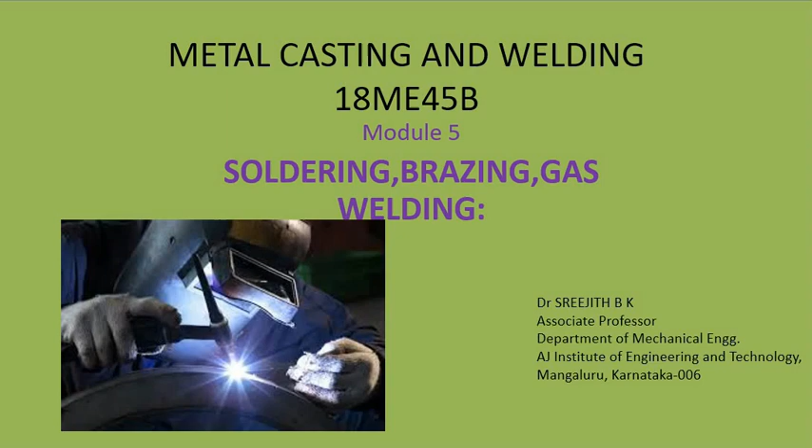First, the soldering. The process of joining two dissimilar or similar metals under heat with the help of a solder and a flux is called soldering. So in soldering, the base metals which need to be joined are not necessary to get melted. Instead, the solder will get melted, and because of the adhesive force between the solder and the base metal, the joint will be established. In order to avoid oxidation, flux will be used.

We are very much familiar with electronic soldering. In the same way, in electronic soldering there will be a heat source called a solder iron or soldering iron, then some flux material and solder. Similarly, for mechanical joints also, usually soldering methods are used in industry.

Flux is a kind of cleaning agent used to prevent oxidation of metals at the soldering point. It helps the solder to melt quickly and allow it to flow freely to unite more firmly. It is usually made up of zinc chloride, ammonium chloride, hydrochloric acid, borax, rosin, turpentine oil, etc.

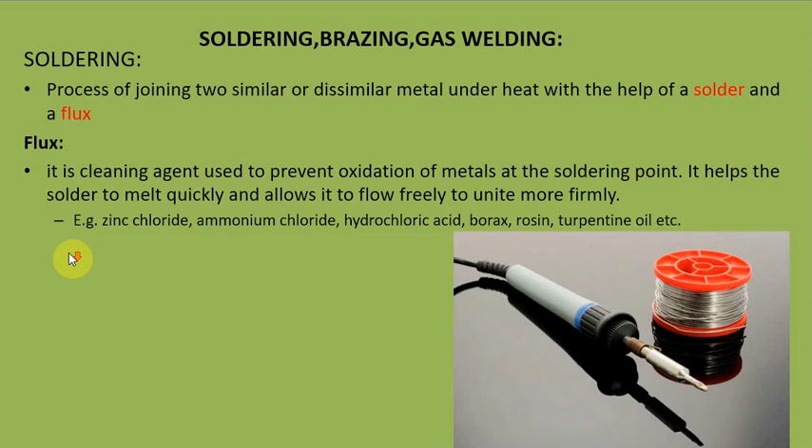Now solders. Generally it is an alloy of lead and tin. It melts at low temperature. For strong joints, a mixture of copper and zinc is used, which has a high melting point. So if the required bond should be strong, then copper and zinc mixture is used. Otherwise, it is a lead and tin alloy.

So solder flows between the gap by capillary action. Due to this capillary action, the molten solder will flow into the gap between the joint metal and fill the gap, and due to this adhesive force, it will make a bond.

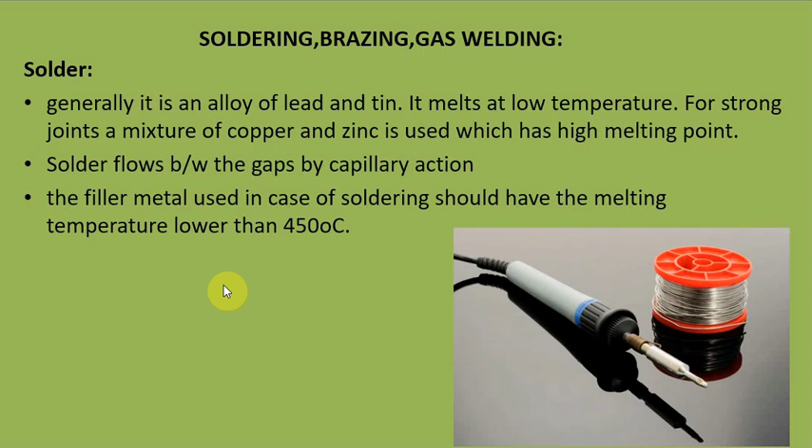The filler metal used in case of soldering should have a melting temperature less than 450 degrees Celsius. This is one of the major differences between soldering and brazing. Here the temperature of filler metal is less than 450 degrees Celsius.

Now types of solders. There are two kinds, soft solders and hard solders. Soft solders are alloys of tin and lead. They have low melting points, like 150 to 190 degrees Celsius. The chemical composition is 0.5% antimony added to improve the mechanical property of solders. Soft solders are used where the joints are not subject to heavy load and high temperature.

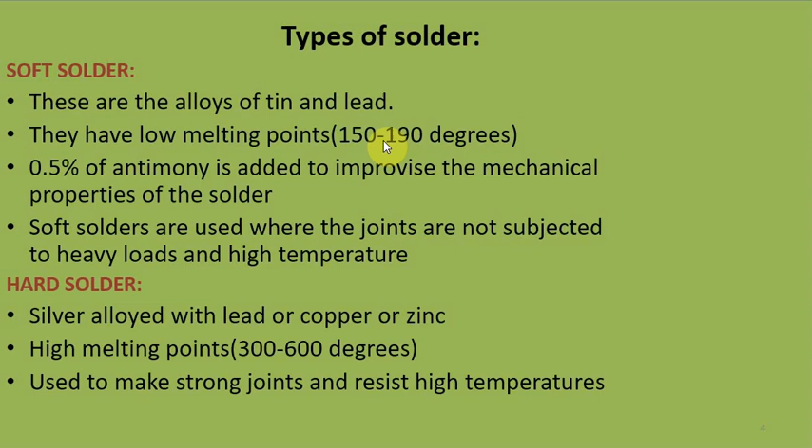In case of hard solders, it's silver alloyed with lead or copper or zinc. It has high melting points, like 300 to 600 degrees Celsius, used to make strong joints and resist high temperature. So compared to the soft soldering method, if you need high mechanical strength, we can go for hard soldering.

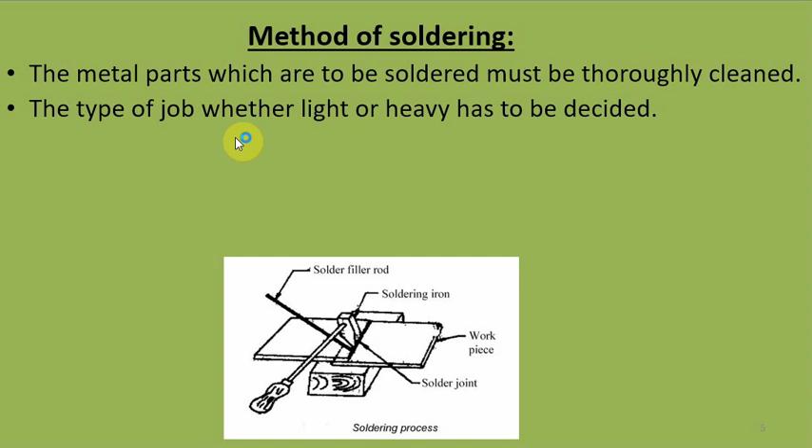This is a schematic for a soldering process. So the steps in soldering: the metal parts which are to be soldered must be cleaned. The type of job, whether light or heavy, has to be decided in order to select the solder. A good soldering iron has to be selected.

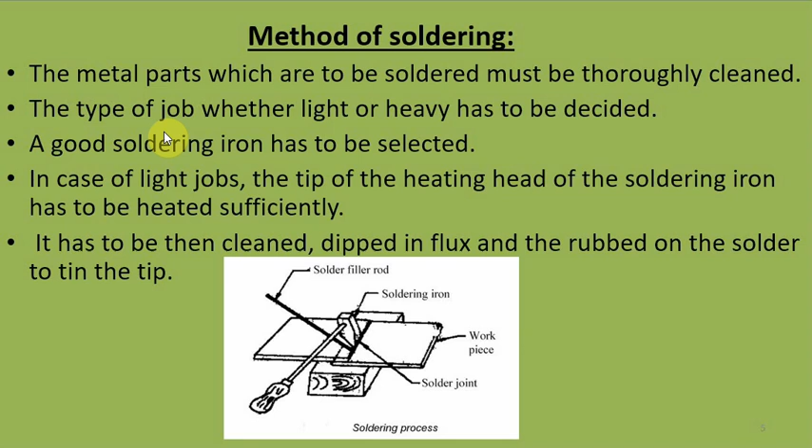In case of light jobs, the tip of the heating head of the soldering iron has to be heated sufficiently. It has to be then cleaned, dipped in flux and rubbed on the solder to tin the tip. The molten solder has to be then deposited on the joint.

In case of heavy jobs, the surface must be tinned first by cleaning and heating using a blowtorch. The job must be dipped in flux. Using a soldering iron, the solder has to be applied over the parts. The parts may be then assembled and heated together until the solder melts. In case a corrosive flux is used, the soldered job must be washed with water.

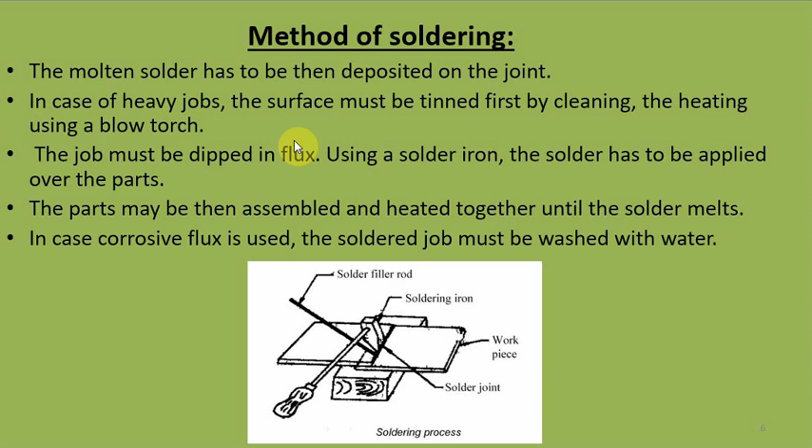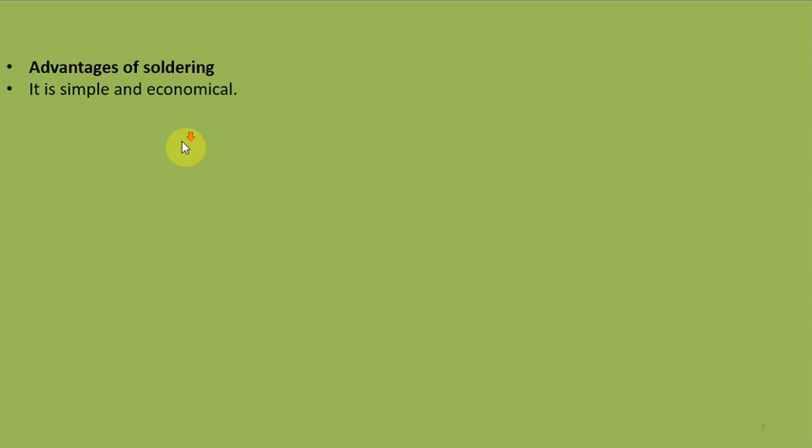Now we will see what are the advantages, disadvantages and applications of soldering. The advantages of soldering: first, it is simple and economical. Base metals are safe against metallurgical damage due to low operating temperature, and also the base metals are not going to melt, so its mechanical, thermal and metallurgical properties will be retained.

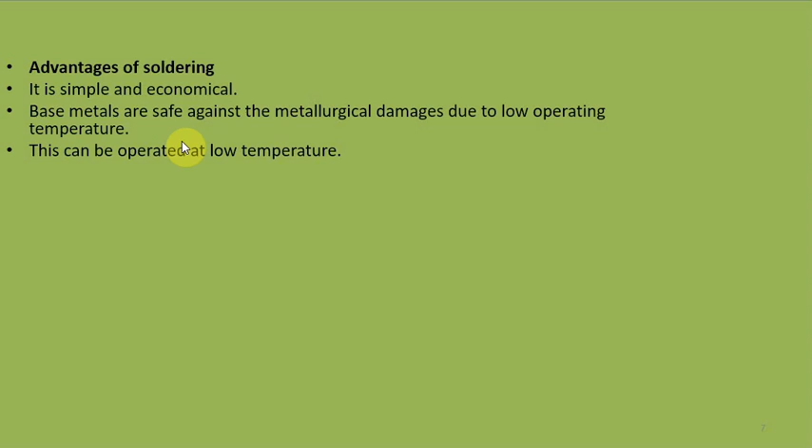This can be operated at a low temperature. Base metal does not melt. Any metals or non-metals can be joined by this process. You know that in case of electronic PCBs, we are joining non-metals. One part may be metal and we are joining that metal part with a non-metal PCB. This operation requires low power and less time to join. It can be easily operated. Now, disadvantages of soldering: the strength of joining is less.

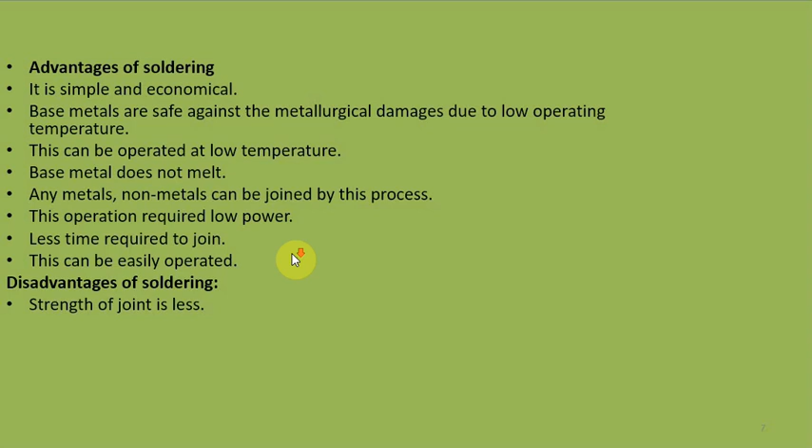It's not useful when joints work under high temperature, because then the solders will get remelted and the joining will be detached. It's not useful for long length welding; mostly it is used in very short or point-wise welding. Heavy metals cannot be welded by this operation.

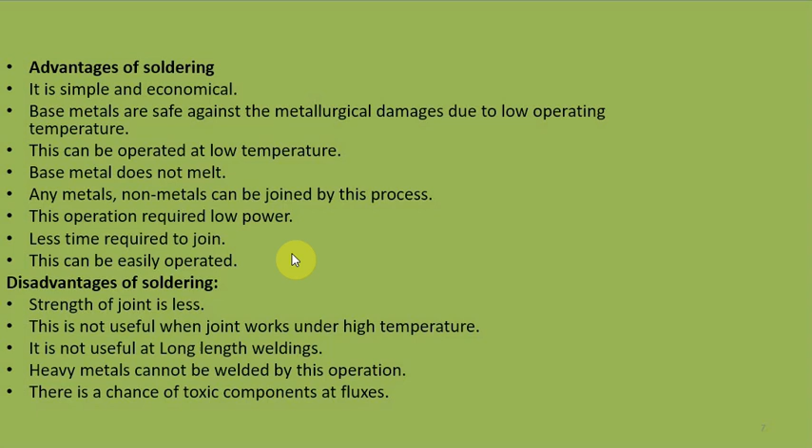There's a chance of toxic components at fluxes. That means when we are applying the flux, it will get melted, and sometimes it may generate some toxic gases which is hazardous to us.

Now the applications are: it's commonly used in electronics, heating, air conditioning, mechanical, fire sprinkler and other similar systems, as well as radiator manufacturing, repair and sheet metal works. Also used in jewelry and stained glass work.

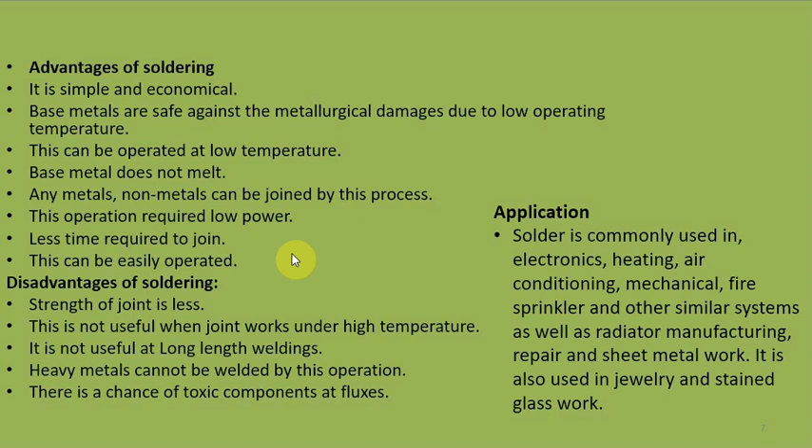The second kind of joining method is brazing. Brazing is the process of joining two metal pieces with the help of non-ferrous filler metal at a comparatively higher temperature, more than 450 degrees Celsius.

This is the major difference between brazing and soldering. Here we are going for a temperature beyond 450 degrees Celsius, and here also we are using a filler metal, which mostly will be non-ferrous.

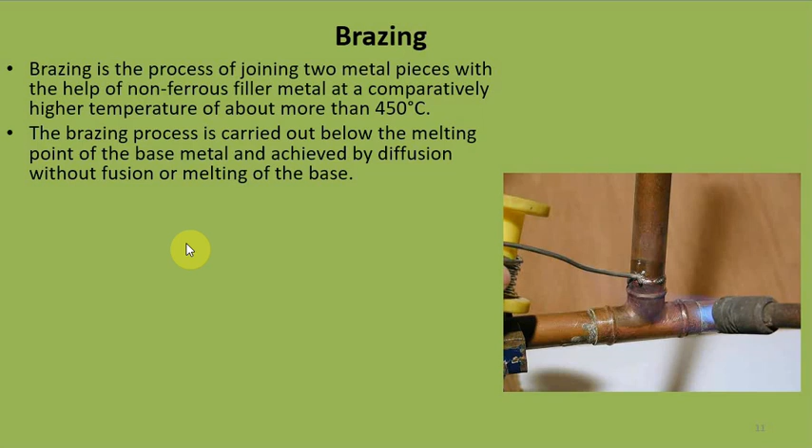The brazing process is carried out below the melting point of base metal. That means the metals to be joined are not going to melt, and the joining is achieved by diffusion without fusion or melting of the base.

This process is most suitable for joining dissimilar metals, and the filler rod used must be made up of non-ferrous metal. The most commonly used filler metals are copper and copper alloys, silver and silver alloys. So it depends upon the type of metals which need to be joined, a suitable filler metal needs to be selected.

The filler metal fills the gap during the operation. The brazing process also needs a suitable flux to prevent the oxidation of the base metal, and commonly used fluxes are borax, fluorides, chlorides and boric acids. So we came across the filler metal and the flux.

The heat generation, or the required heat, is generated with the help of a welding torch, usually either oxygen acetylene combination or any other oxy fuel combination, or even an LPG heating torch, also used in case of brazing.

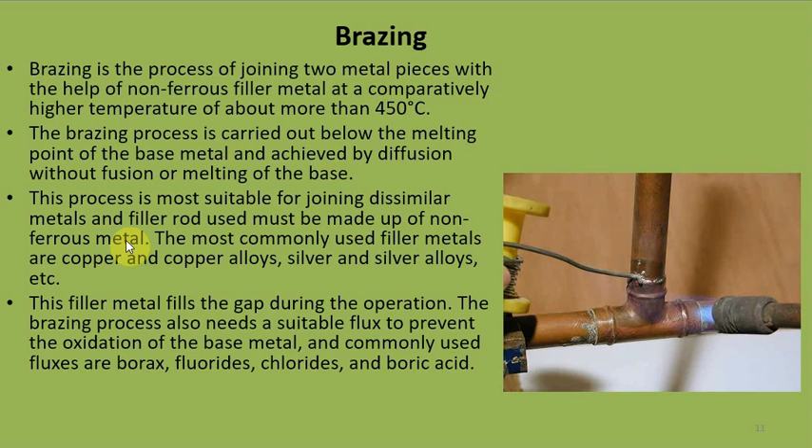The step-by-step process related to brazing procedure: first, the surfaces to be joined are cleaned, and dust, oil, grease, oxides and other foreign substances are to be removed.

Now apply the suitable flux where brazing is to be carried out. This is used to avoid base metal oxidation and to help the filler material flow easily by capillary action. The filler material is placed at the place where the brazing is to be carried out, like this.

So here we want the joint, so we keep the filler material here. Even separately feeding, if the worker is an expert, separately we feed the filler material.

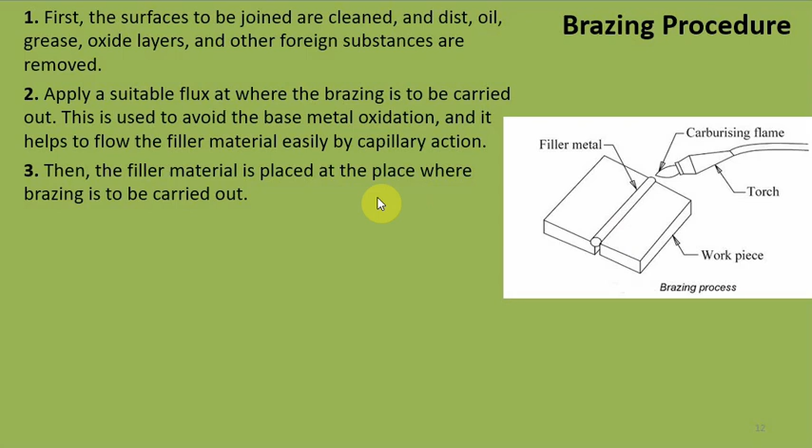By using a carburizing flame, raise the temperature above the melting point of the filler material so that the filler metal will get melted. After raising the temperature of the filler material, molten metal is formed and is flowed into the gap by capillary action.

Allow the filler metal and base metal to solidify, then cool the base metal slowly to get a strong bonding. The leftover fluxes are cleaned immediately after the brazing process because it is corrosive in nature.

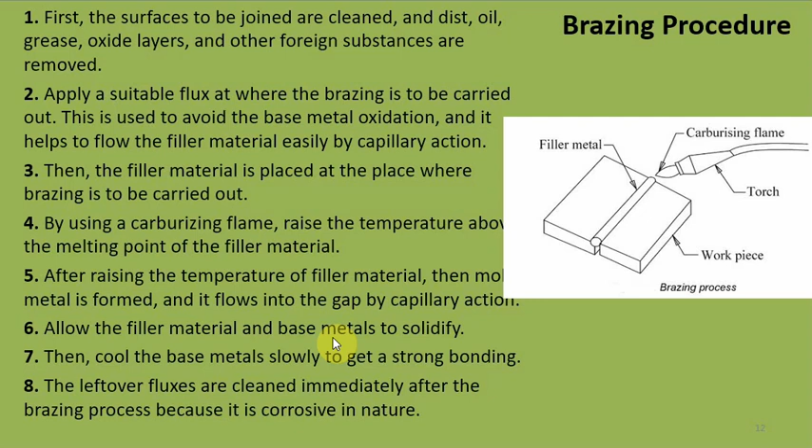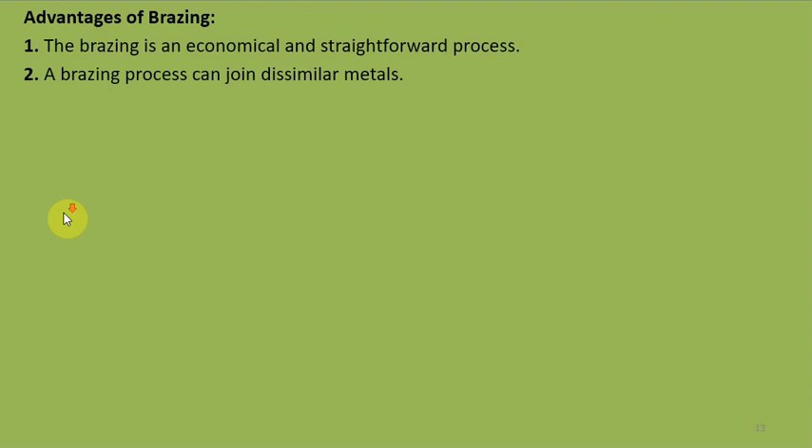Now the advantages of brazing are: it is an economical and straightforward process. Brazing can be used to join dissimilar metals. Low gauge or thin section plates are joined very easily, but such pieces cannot be joined by welding.

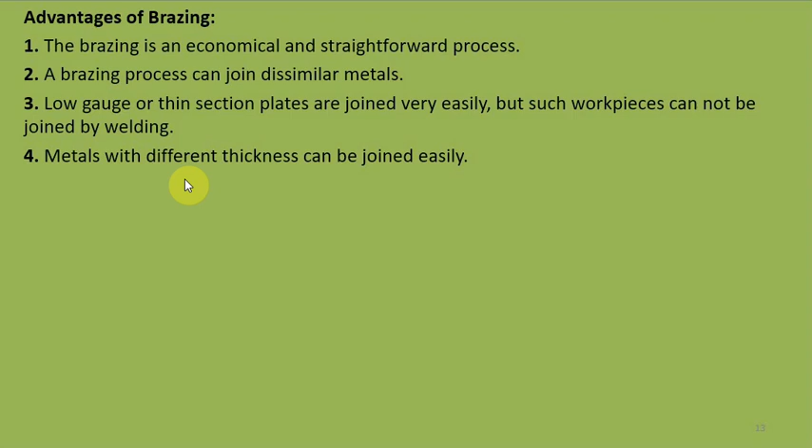So brazing is used mainly whenever we have thin plates that need to be joined. Metals with different thicknesses can be joined, but we cannot go for very thick metals. Joints produced with the brazing process are better in appearance because stress will not be induced, there is no metallurgical damage, and no distortion of the plate takes place.

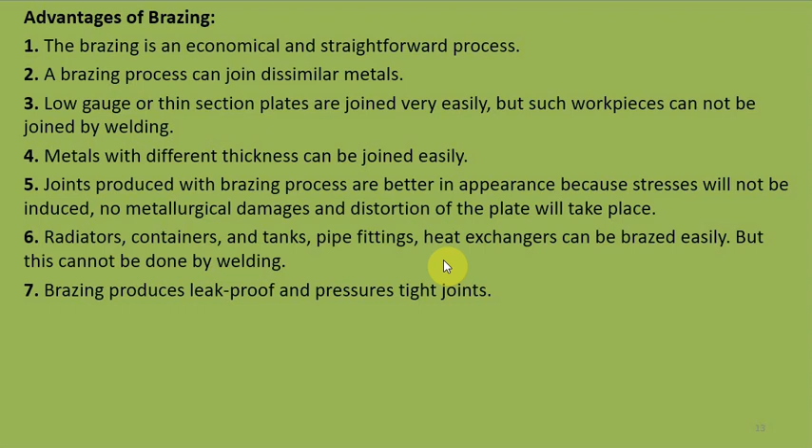So application-wise: radiators, containers and tanks, pipe fitting, heat exchangers, air conditioning and refrigeration conduit pipes - everything can be easily brazed, but it cannot be done by welding. Brazing produces leak-proof and pressure-tight joints.

The disadvantages are: heavy sections cannot be joined by brazing.

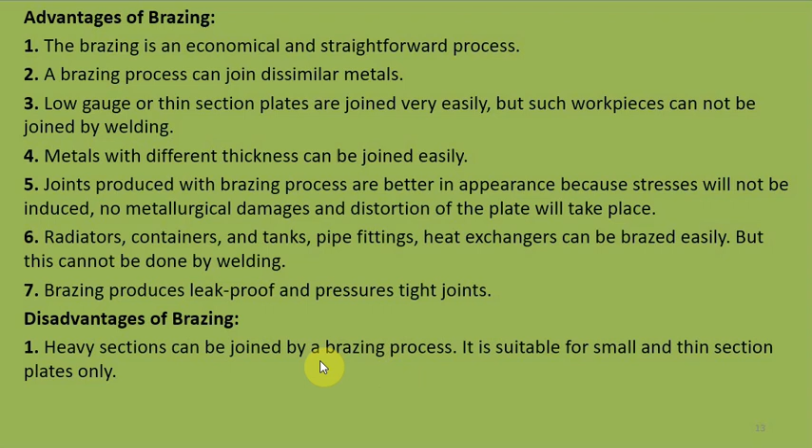Heavy sections cannot be joined by the brazing process. It is suitable for small and thin sections only. Skilled labor is required for brazing. Brazing results in low strength joining compared to welding.

Now let's go for a comparison between the soldering process and the brazing process. This is very important. Solder is used in the soldering process, and spelters are used in the brazing process. That means a filler metal is used in both.

In soldering, joints are not very strong. In brazing, joints are comparatively strong and pressure tight. Soldering cost is less, while brazing cost is more.

Chlorides of zinc and rosin are used as flux in soldering. Ash or borax is used as flux in brazing.

Low temperature is sufficient for soldering, meaning less than 450 degrees, whereas high temperature is necessary for brazing, more than 450 degrees. Soldering is suitable only with thin sheet metal, while brazing is suitable even for comparatively thicker metals, but not for heavy thick metal.

Soldered parts are to be cleaned with water, while brazed parts are to be allowed to cool slowly, with no need to clean again. If required, we can chip off the excess flux formed. So these are the comparisons between soldering and brazing.

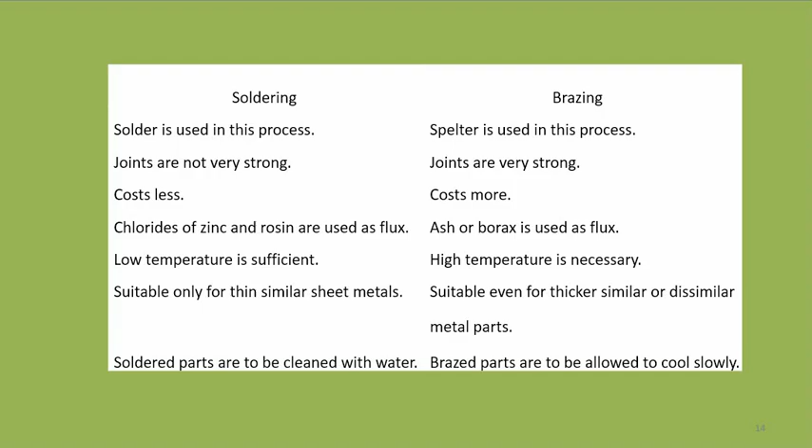Now we will see what gas welding is.

The welding torch is connected to two gas cylinders through two hoses. One usually will be the oxidizer or oxygen cylinder, and the other will be the fuel cylinder.

There will be pressure regulators which regulate the pressure or flow rate of gas coming out of these cylinders.

So the oxygen and the fuel gas will get mixed, and it will be burned at the tip.

Based on the kind of fuel used, the oxy-fuel process is also called oxy-fuel welding, based on which fuel is used in combination with oxygen.

It can be classified as oxyacetylene, oxyhydrogen, etc.

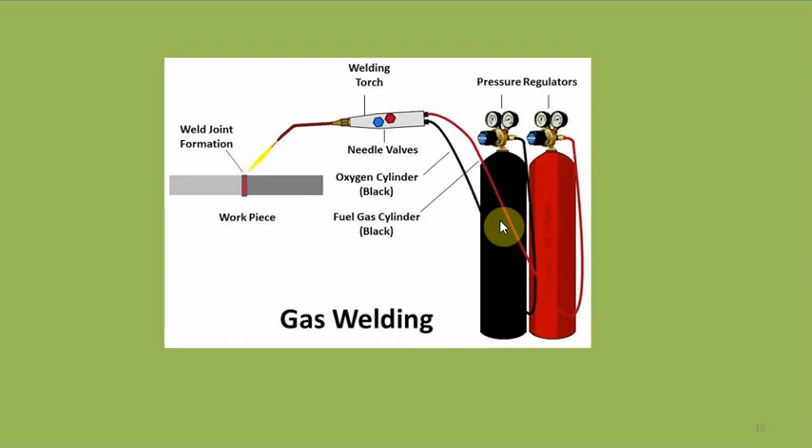So gas welding is a welding process that melts and joins metals by heating them with a flame caused by a reaction of fuel gas and oxygen.

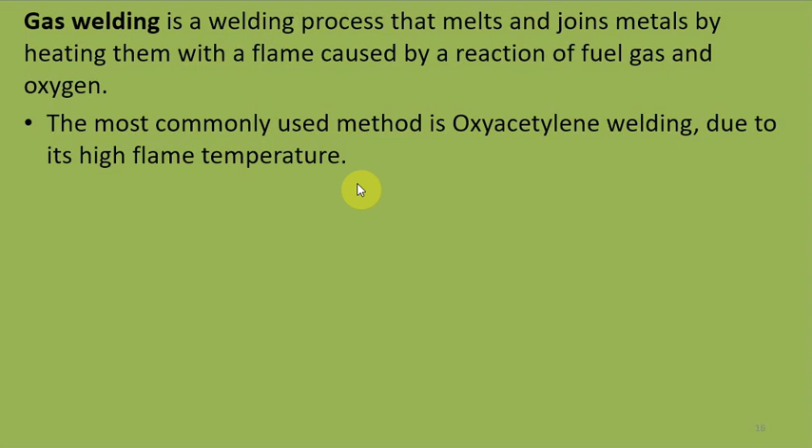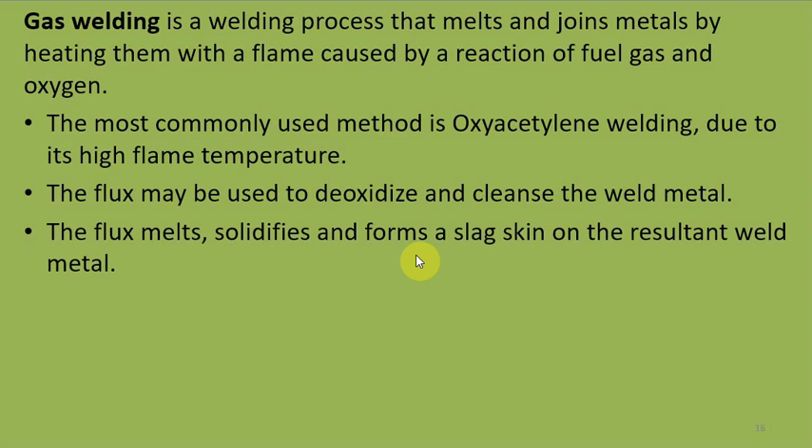The most commonly used method is oxyacetylene welding due to its high flame temperature. Flux may be used to deoxidize and cleanse the weld metal. The flux melts, solidifies, and forms a slag skin on the resultant weld metal.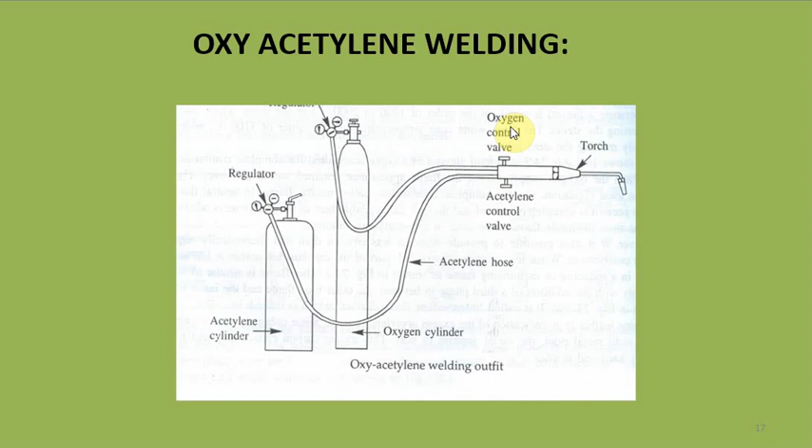This is the torch tip where the flame is formed. Welding torch, pressure regulator, cylinders, goggles, spark lighters, flux, apron, and gloves are the required components for this welding.

Oxygen is usually stored at a pressure of 13.8 to 18.2 megapascals. Acetylene can be stored, but if stored above 200 kilopascals, it may explode.

In such cases, it has to be generated. So either you can use a pre-filled acetylene cylinder or you can use an acetylene generator.

To start the flame, the acetylene is released slowly and lighted with a spark lighter at the torch tip. So initially the acetylene is released first, then it will react with atmospheric oxygen to form the flame.

So C2H2 is the acetylene. It will react with oxygen, which results in 2 CO2, carbon dioxide, water, and heat.

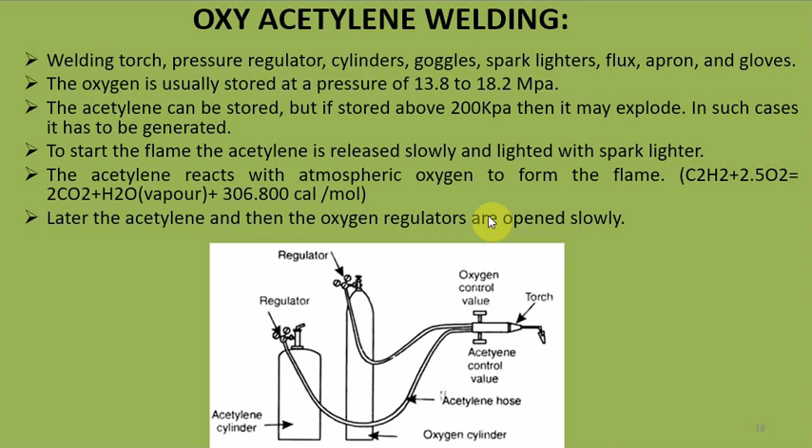It is an exothermic reaction. Later, the acetylene and then the oxygen regulators are opened slowly in order to maintain a stable, required kind of flame.

Some important applications of oxyacetylene welding are for joining most ferrous and non-ferrous metals, carbon steels, alloy steels, cast iron, aluminium and its alloys, nickel, magnesium, copper and its alloys, etc.

For joining thin metals, for joining metals in automotive and aircraft industries, for joining in sheet metal fabrication plants, and for joining metals that require a relatively slow rate of heating and cooling.

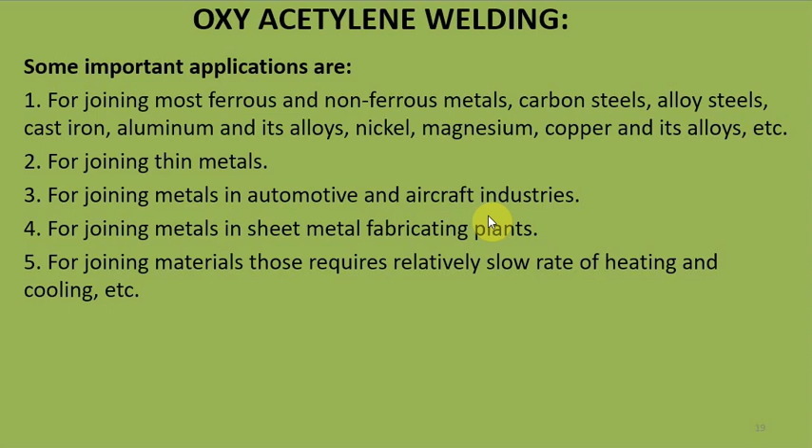Some advantages are it's portable and most versatile process. Better control over the temperature by adjusting the oxygen valve, and better control over filler metal deposition rate. In gas welding, the source of heat and filler metal are separated, unlike arc welding, which provides better control over filler metal deposition rate. It is suitable to weld dissimilar metal, and has low cost and maintenance.

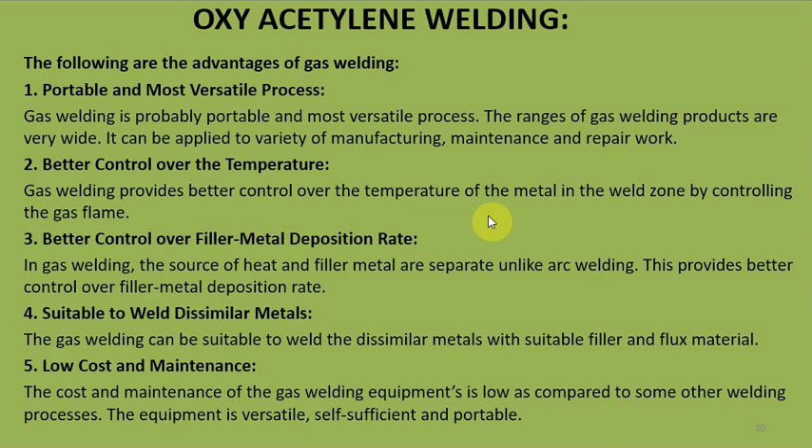Some disadvantages are: not suitable for heavy and thick sections. Less working temperature of gas flame compared to other kinds of welding like arc welding. Slow rate of heating, and not suitable for refractory and reactive metals. Refractory metals like tungsten, molybdenum, and reactive metals like titanium, zirconium cannot be welded by gas welding. There is a large heat affected area, because the heat zone produced by the torch tip or flame is larger in area, so it will affect the metallurgical property of the material.

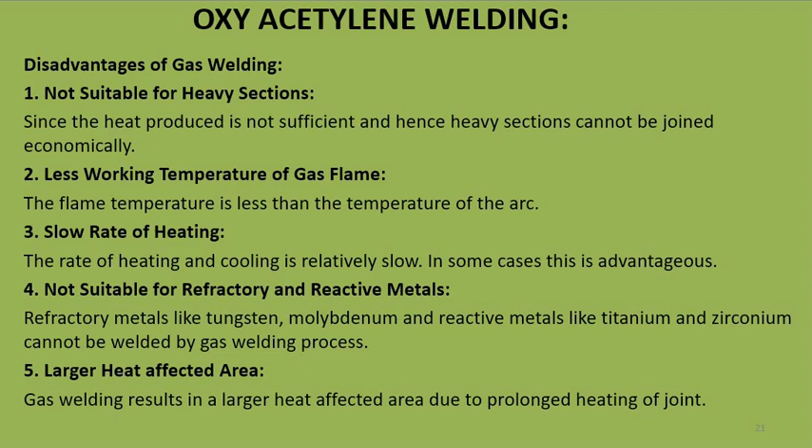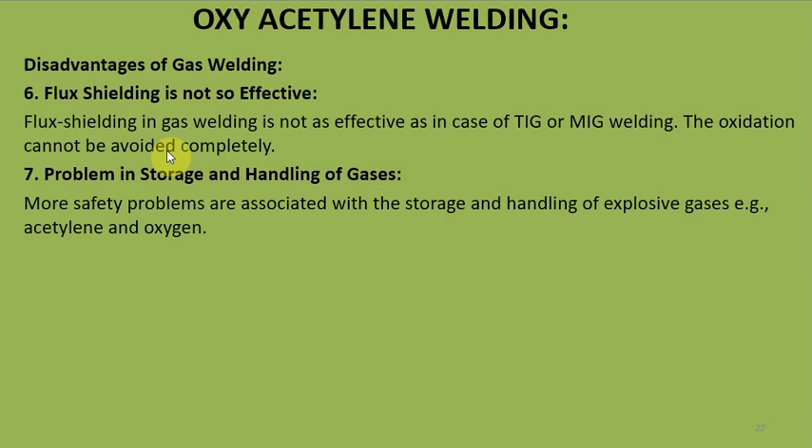Flux shield is not so effective in gas welding as it is in case of TIG or MIG welding. Oxidation cannot be avoided completely, because here we are directly injecting oxygen gas for the flame requirement. We are pressurizing the oxygen to impinge on the heat affected zone, because of that there is comparatively more chance of oxidation. There is also a problem in storage and handling of gases, with more safety issues associated with storage and handling of explosive gases, especially acetylene and oxygen.

Now we will see which types of flames we can achieve by controlling the oxygen flow into this torch.

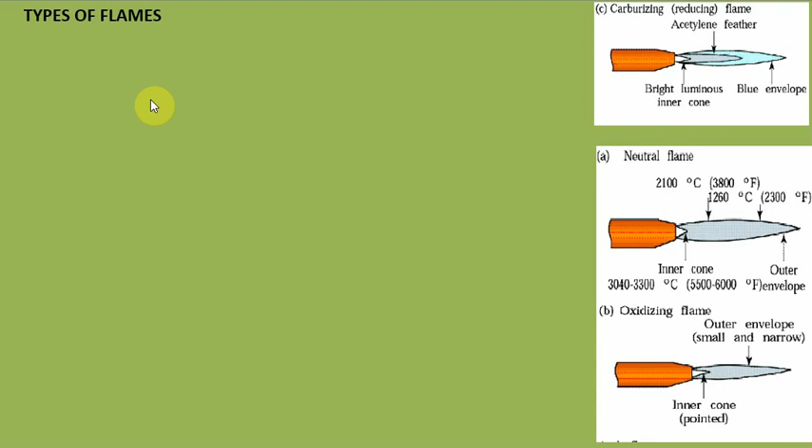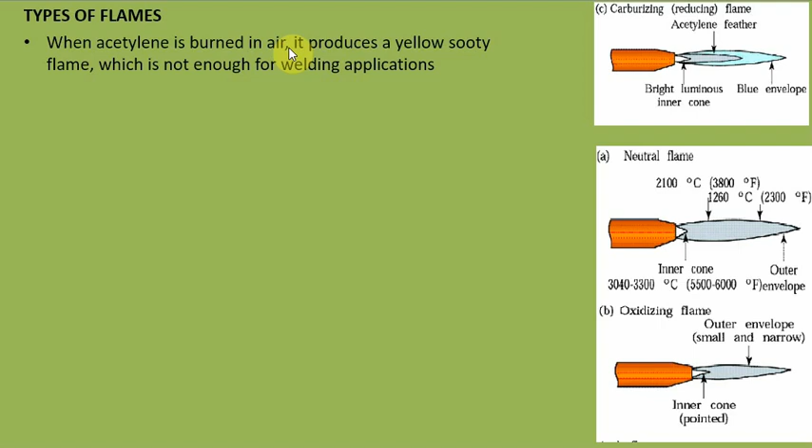When acetylene is burned in air, without the supply of pressurized oxygen, it produces a sooty flame, which is not enough for welding application. When oxygen is turned on, the flame immediately changes into a long white inner area, surrounded by a transparent blue flame, and it is called a carburizing flame, having a temperature of nearly 3000 degrees Celsius. These flames are used for hardening the surface.

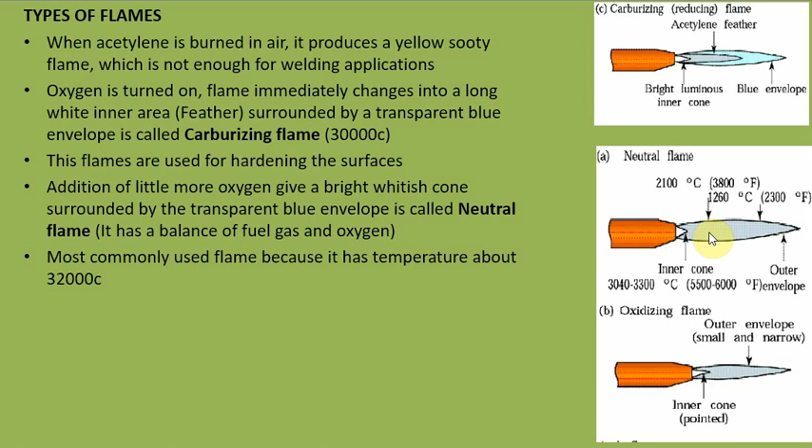Addition of a little more oxygen gives a bright whitish cone, surrounded by a transparent blue envelope, called a neutral flame. This is the most commonly used flame, because it has a temperature more than 3200 degrees Celsius. It is used for welding steel, aluminium, copper, cast iron, etc. So neutral flame is usually used.

If more oxygen is added, the cone becomes darkened and more pointed, while the envelope becomes shorter and more fierce. It's called an oxidizing flame, and its temperature is 3400 degrees Celsius. It is used for welding brass and brazing operations, and in refrigeration applications this oxidizing flame is used.

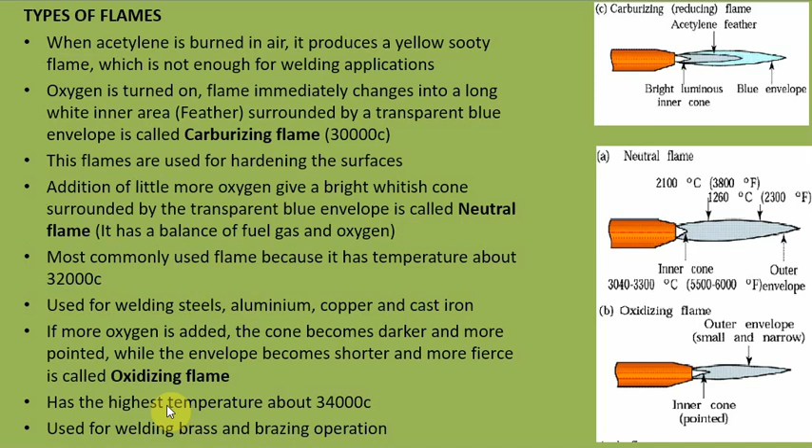The next kind of welding process is oxyhydrogen welding. This is exactly similar to oxyacetylene welding. The difference is, instead of an acetylene cylinder or acetylene fuel, we use hydrogen for welding. So the same schematic can be redrawn here, changing acetylene to hydrogen.

The apparatus required for oxyhydrogen welding is similar to that for oxyacetylene welding, consisting primarily of two steel cylinders of oxygen and hydrogen. The oxygen is carried to the inner tube and the hydrogen is carried to the outer tube. After the oxygen is turned on, the flame is adjusted to work, and mixing is done at the tip of the blowpipe as the gases enter the flame. Hydrogen and air can be used with the same sort of blowpipe for light work requiring moderate heat, such as lead burning, but the process is much slower and more expensive than the oxyhydrogen flame.

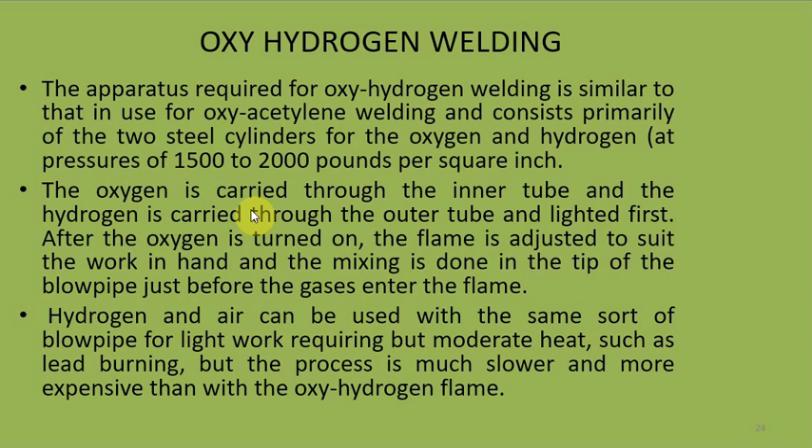The difference between oxyacetylene flame and this one is: oxyhydrogen flame has a temperature of about 2500 degrees Celsius, while oxyacetylene flame has a temperature of more than 3000 degrees Celsius. The chemical reaction happening is that two molecules of hydrogen combine with oxygen, and the final product is water plus heat.

Oxyhydrogen welding is used for joining metals with low melting points like aluminium, magnesium, etc. Iron, steel, copper, lead, zinc and other industrial metals can also be welded by this process. The cost is similar to that for work done by the oxyacetylene process, although somewhat higher for most operations. These are the applications of this process.

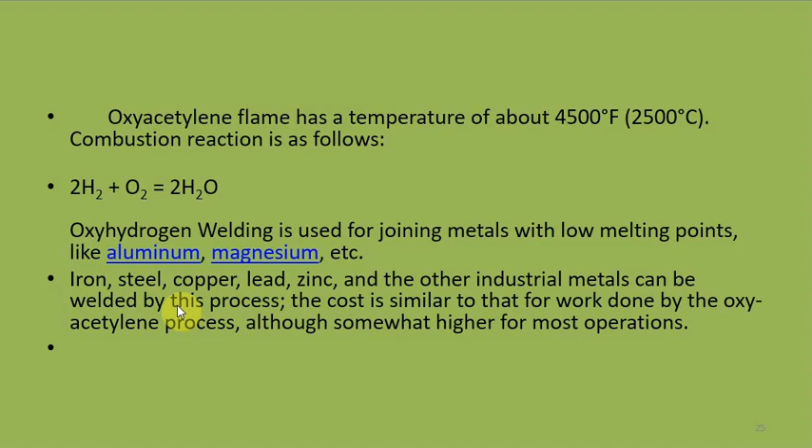The third kind is air acetylene welding process. Here we are not using any external gas cylinders; instead, only an acetylene cylinder will be used, and that acetylene will be burned in open air. So it will actually look like a Bunsen burner.

And the commonly used fuels are acetylene, natural gas, propane and butane. So this is simple portable type.

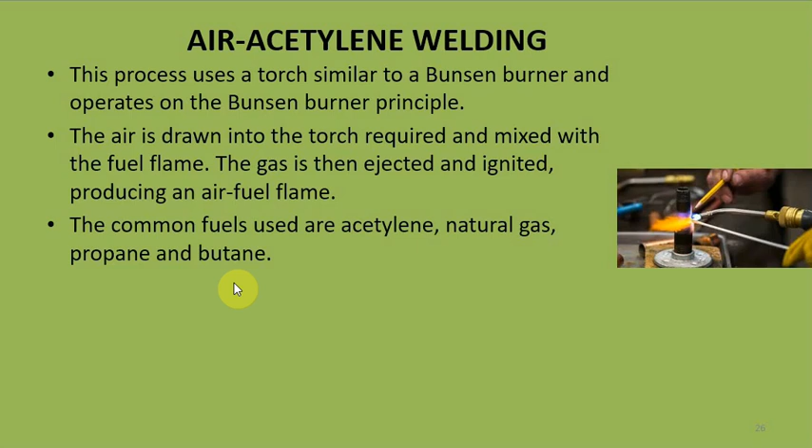This type of welding has limitation since the temperature is lower than that attained with oxyacetylene. The air fuel welding process is used in lead welding and many low melting temperature metal alloys, like brazing and soldering process.

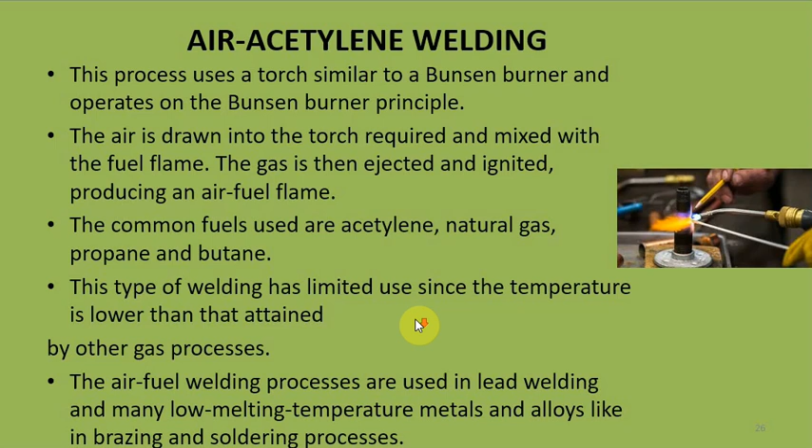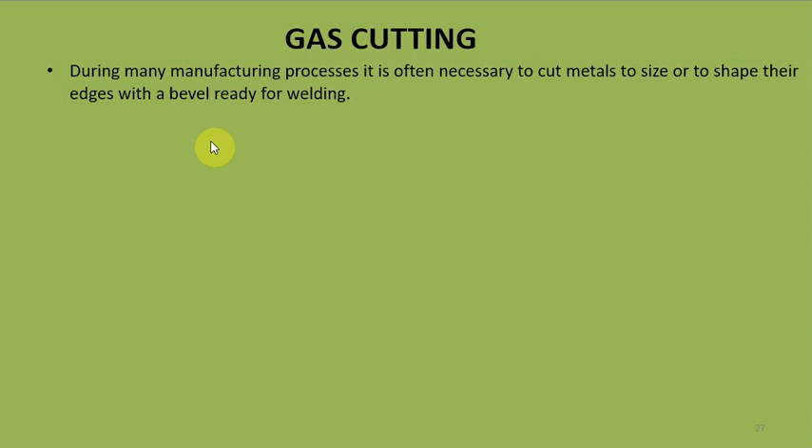Now we are going to discuss some cutting methods, cutting of metal. First one is gas cutting method. In many manufacturing industries, we have to cut metal sheets. One of the easiest methods is using gas cutting. There are two operations involved in oxy fuel cutting.

The equipment used for gas cutting is somewhat similar to oxyacetylene welding. First the flame is generated and the heating flame is directed to the metal to be cut until it rises to a bright red heat. The surface that needs to be cut is exposed to this heat generated by the torch, until it turns to bright red color. This is called the ignition temperature, which will be nearly 900 degrees Celsius for cast iron and similar metals.

A stream of high pressure oxygen is then directed. Once it reaches that bright red color, a stream of oxygen is directed to the hot metal. Why do we need this stream of oxygen? It immediately oxidizes the metal in that red zone, and the melting point of this oxide is below the melting point of steel. The oxide is melted and blown away. At 900 degrees Celsius, the oxide will get melted very fast, so we will get a cut there.

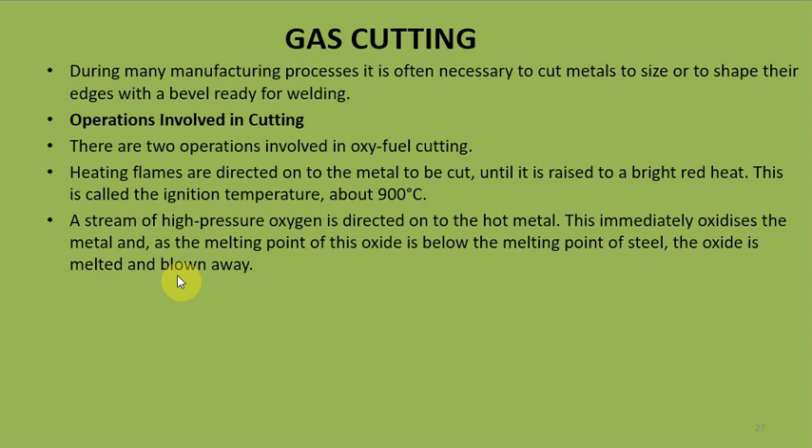The metal is therefore cut by chemical action, not by melting the iron or steel. The heat needed to keep the cut going is provided partly by the heating jet and partly by the chemical action. So initially it is heated, then the oxygen jet is applied, which will oxidize the heated zone, converting it into oxide. This oxide has a lower melting point, so because of that lower melting point, it gets melted more easily than the base metal, giving us the required cutting.

So this is the chemical reaction: first iron plus oxygen forms FeO, plus heat, then a second reaction, then a third reaction, finally resulting in the oxide of iron.

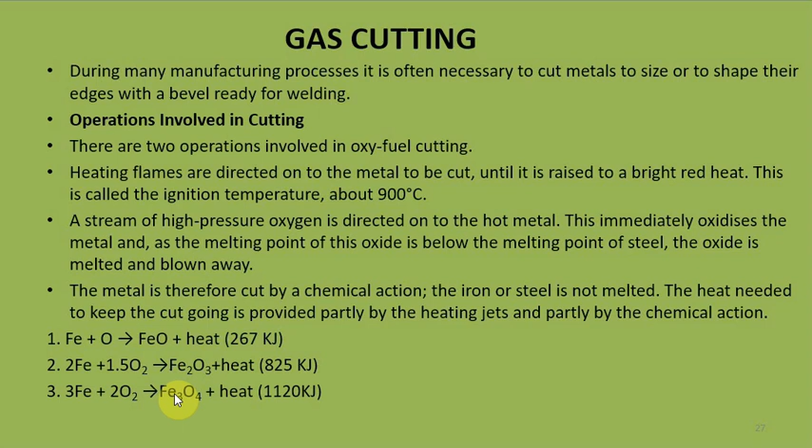The last method of cutting is powder cutting. Suppose we are using some stainless steel, and we need to cut it. This stainless steel oxide has a property that it will melt at a higher temperature than the stainless steel itself. But in case of other steels, like cast iron or mild steel, the oxide will melt at a lower temperature than the base metal.

That's the method used in gas cutting. But here, since stainless steel oxides melt at a higher temperature, we cannot use that same method. Why? Because if we want to use it, we would have to elevate the temperature of the torch, and that's not effective.

So what we do instead is inject some iron powder into the flame, using an iron powder hopper. This iron powder impinges on the surface that needs to be cut.

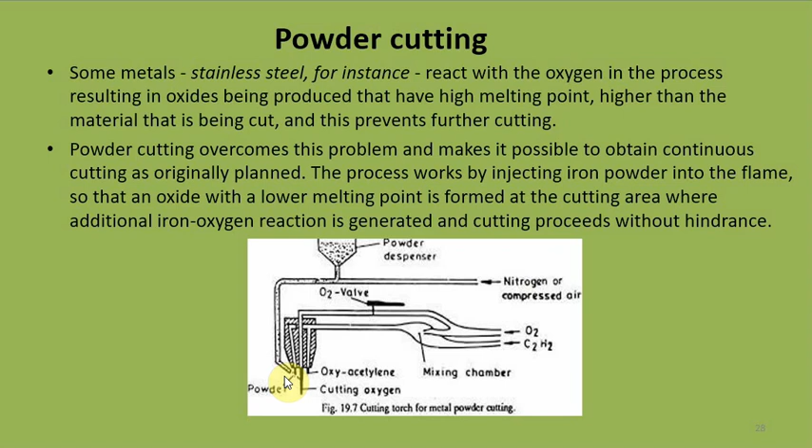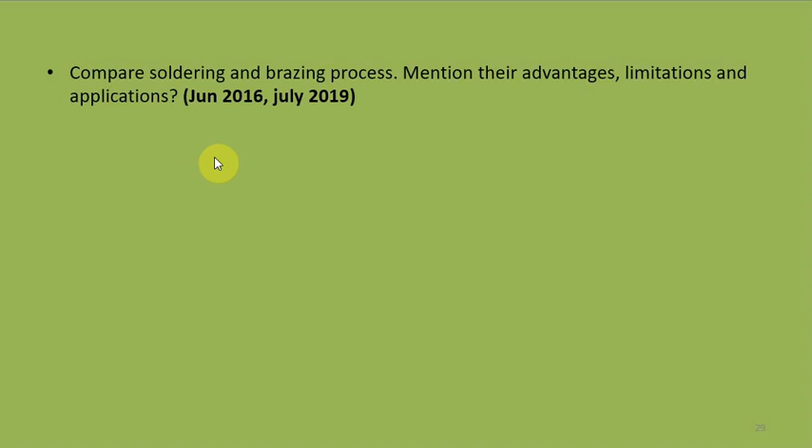Now we will see some important questions asked in previous years. One is: compare soldering and brazing, mentioning their advantages, limitations and applications. Most of these questions are asked for 10 marks. With a neat sketch, explain the oxyacetylene welding process and the types of flame used. With a neat sketch, explain the brazing process. That's all about this topic.